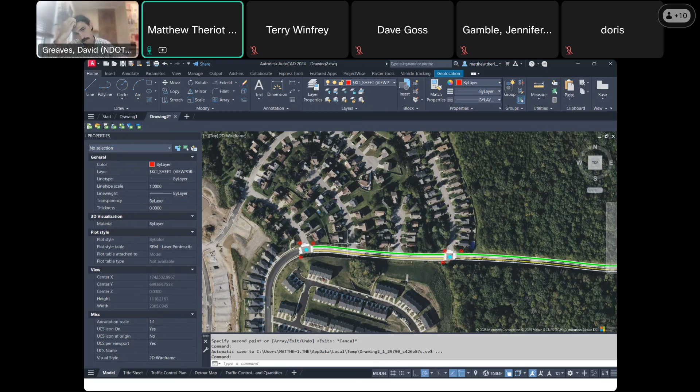So I guess two of the main things that I would be interested in you looking at is if there's a chance of all-way stops being warranted at one or both of these intersections to get vehicles to come to a complete stop and to allow pedestrians to cross if they need to, or looking at traffic circles at either of these locations.

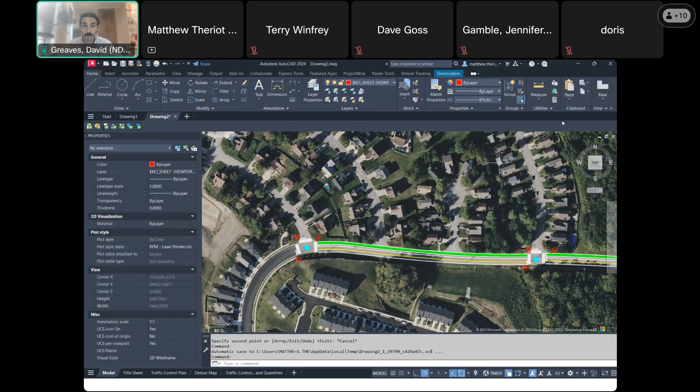Yeah, well, thank you for putting so much effort into this concept. It definitely is one approach that would make improvements. I will say, in terms of doing stop control and crosswalks and things, that does fall a little bit outside of a typical traffic calming project. But I'll discuss it with the team and see if, maybe if the paving schedule is coming up, we can think about that. So anyway, I can't give you a yes or no on if we'll do that right now, but I appreciate the input for sure. Yeah, thank you, David.

Hey, David. Also just wanted to add to Matt's point. Not sure if this is going to be considered in the priority for any projects, but as you saw in the picture, the houses aren't over the whole Mulberry Downs. As you can see, there's forest on both sides, both the left and the right side, for a fair amount of Mulberry Downs. It's only when you hit that playground area that Matt pointed out that the houses start. So not sure if that would influence or change priority for the whole street, but just wanted to call that out.

Yeah, thank you for sharing. I'll talk a little bit about how that affected our initial design draft when we're there, but it is something that, you know, we've noted when we came up with our concept.

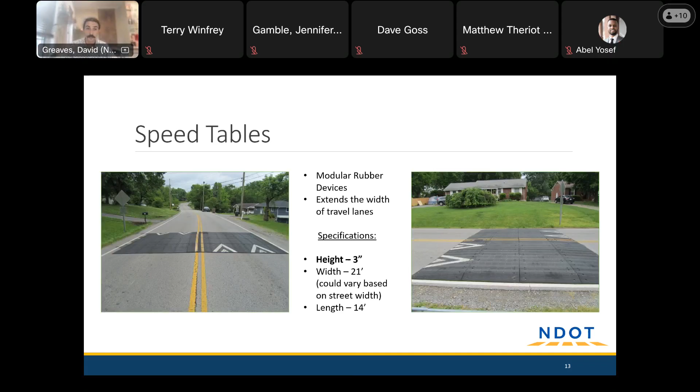Similar to those are speed tables, which stretch all the way across the road. The main difference is these don't allow emergency vehicles quite as much leeway as speed cushions do. The gaps you see between cushions are intended to reduce the impact to larger vehicles such as fire trucks and ambulances, while maintaining impact to smaller private vehicles.

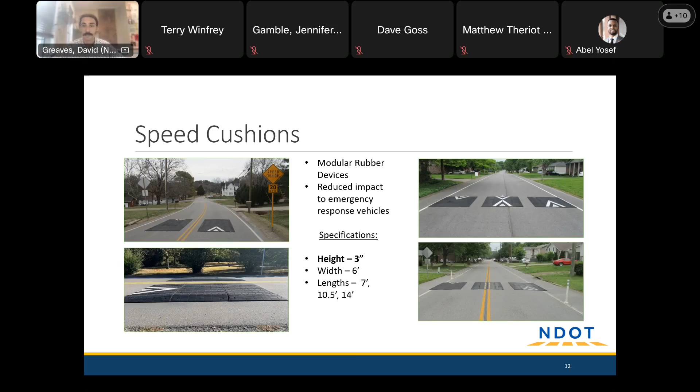We use speed cushions most often because we've seen that they work - a good way to achieve the program's goals. A study we conducted in March 2023 did before-and-after counts on 6 projects, finding the average speed come down from 31 miles an hour to 22, and the 85th percentile speed came down from 37 to 25. Certainly y'all are seeing speeds a little higher than that, at least in the location we counted, but we'd hope speeds would come down to a much more manageable and safe level with a design that included vertical measures.

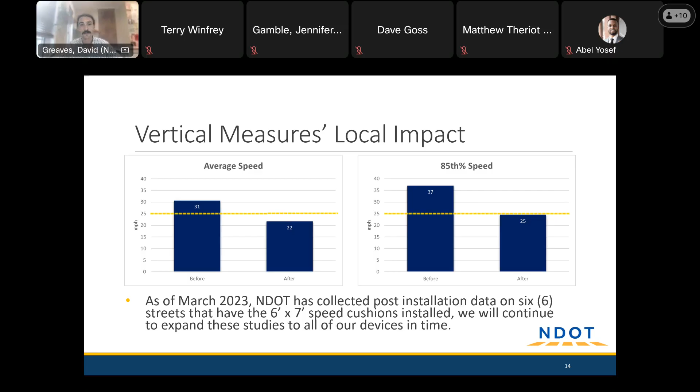There are plenty of places where speed cushions or any vertical measures aren't such a good idea - including hills of a certain steepness, as well as curves below a certain tightness. When we encounter situations like that, we'll sometimes use radar feedback signs. Most people have encountered these - it's a solar-powered device mounted to a speed limit sign that flashes the speed of an approaching vehicle back at them as they approach.

So the idea is if you are maybe inadvertently going much faster than you should, this would give you an indication that you should slow down.

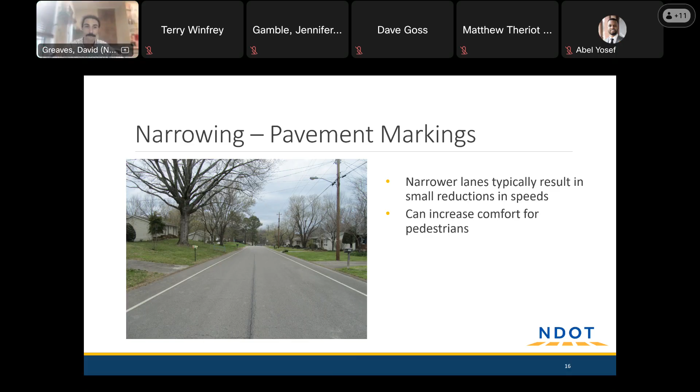We also do pavement narrowing, which is something we've heard mentioned in the feedback. This psychologically makes a road feel a little more claustrophobic. The thinking is if you have a lot of room to maneuver as you're driving, it's much easier to go fast without feeling discomfort. You feel like you're on a highway, and you'll drive like you're on a highway. So when we narrow the lane widths, that can induce slower speeds by countering that effect. It's not a physical measure, just paint on the road, so it doesn't do that much, but it can increase comfort for pedestrians - if I walk over here, I'm on this side of the line, and vehicles are on that side. That's one effect it can have, but in general it's more of a supplement than a primary design tool for traffic calming projects.

At intersections that are excessively large, we sometimes do what are called bulb outs. These work similar to pavement narrowing, but at intersections. When you have really large turning radii, it's easy to take that turn quicker than might be safe for a pedestrian environment. So we narrow it from the outside in by tightening the turning radius so turns happen at a speed slow enough that you'd have time to see a pedestrian crossing the road. Another benefit is it shortens the crossing distance - right now with a roadway that's 37 feet, that takes quite a bit longer, with more potential conflict with vehicles, than if it was narrowed down to about a 20-foot 2-lane distance.

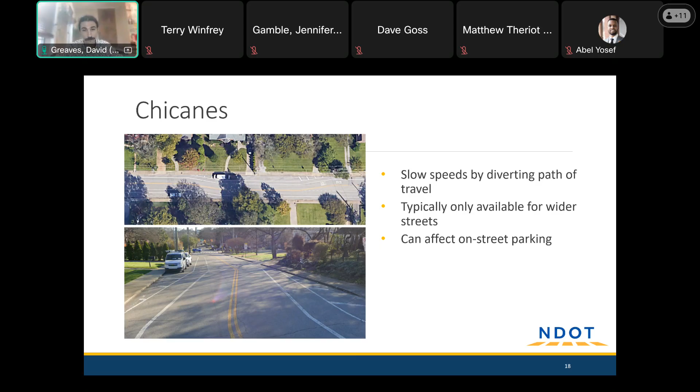We can also do things called chicanes, where the center line is zigzagged back and forth along the length of the roadway. This is Fairfax Avenue over in the Hillsboro-West End neighborhood. You can see these are compatible with bike lanes if a roadway is wide enough. I'll have to check - this may be closer to 40 feet than 37 - but this is something we might consider on Mulberry Downs, since you have quite a bit of pavement to work with. I'd say the one downside is it can affect on-street parking if you limit it to only one side. But from what I've seen so far, there doesn't look like there's tons of on-street parking happening right now, so maybe that's not as big a deal.

And then lastly, we sometimes do traffic circles. I'll say these aren't super common in the NSTC program, primarily because we need to make sure intersections are wide enough that all necessary turning movements can be made, whether it be a school bus or fire trucks and things.

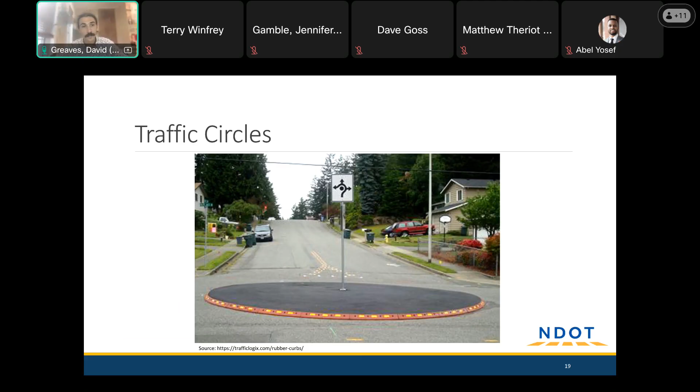Would love any additional feedback or questions on any of the tools. Also would love some more ideas if y'all have any about what we might be missing, things we should consider while we do our site visit and refine the design. So anyone who would like to share anything, please feel free to speak up.

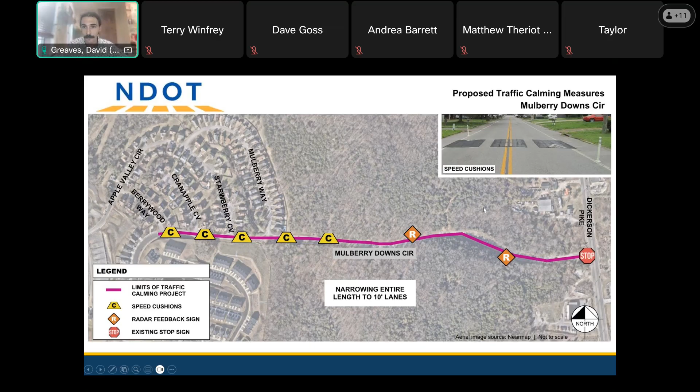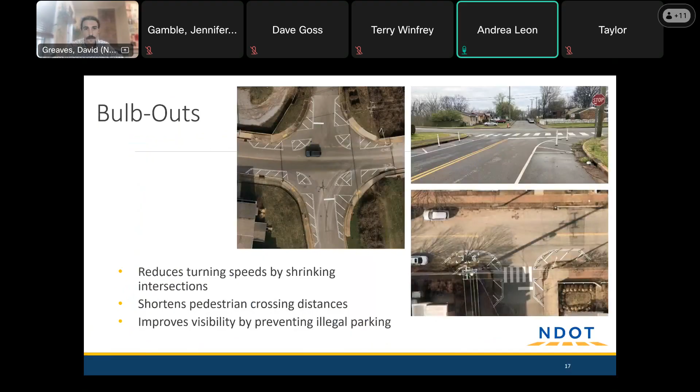This program specifically handles streets one at a time. That can sometimes feel a little narrow or illogical, but we have tried it in more of a neighborhood focus, and it created a lot of unforeseen complications that made some projects basically come to a standstill, and others just sort of get mired in who gets speed cushions and who doesn't, which we want to avoid.

So what I want to let you know is that we would love for that street, or maybe the string of streets, if it's Apple Valley Circle to Mulberry Way, to apply. Certainly, if that speeding and cut-through traffic is happening already. And that application window is opening soon. I think it'll be maybe the first 2 weeks of September. But I can let you all know if you're interested in applying for more streets.

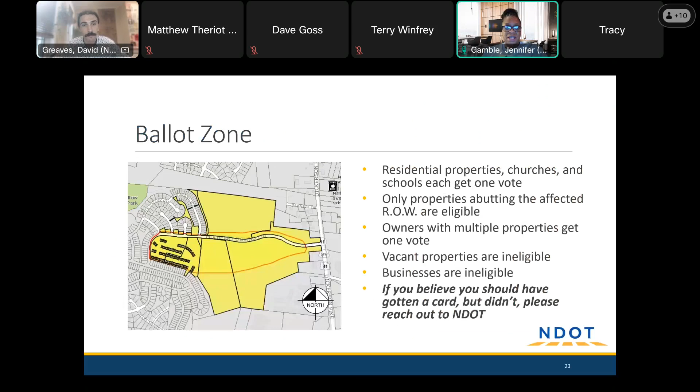David, I may have missed this, so if I did, forgive me. Did you give us a timeline for when you will be able to go back and discuss with the team what has been discussed here today, and when you will have a second revised plan for everybody to look at for that second meeting? Yeah, you did not miss it.

I glossed over it. So the design phase is usually around 2 months. I will say we've got more things to look into tonight than a standard project. So perhaps a little longer, but we'll go out and do our site visit, have our discussions with NDOT, kind of ASAP, and then hopefully get some quick answers and be able to move forward with design. Okay.

So at least 2 months before we hear back from you, and anyone who's interested in applying for traffic calming for Apple Valley Circle, the applications will open up. We think the first 2 weeks in September, and it's usually a 2-week window. And so want to make sure if someone on Apple Valley Circle wants to apply for traffic calming for Apple Valley Circle, probably need to do that during that September opening, because we probably won't hear back from NDOT and David about this project before that time frame closes, and the next time to apply won't be until the spring.

Yes, that's all correct. There may be some upcoming changes to the application window period. I'm not sure if they're totally worked out yet, so I won't give y'all potentially wrong information. But at the very least, first 2 weeks of September likely will be that next application window. And these can be applied for by an HOA, so you don't need to do the 4 individuals. But yes, that's all correct.

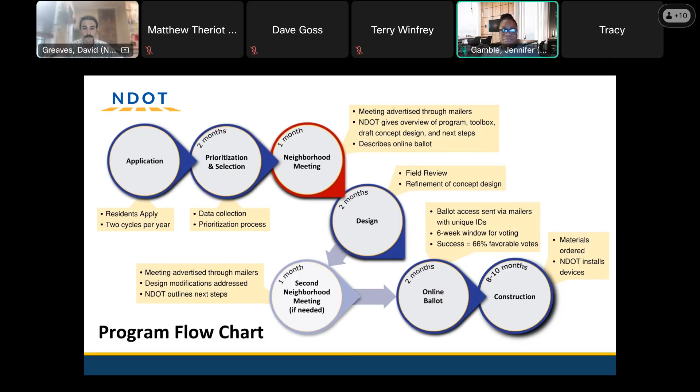I saw in the chat a side note question, and if you will indulge me 30 seconds, I'll try to answer it, because it's not related to this. It's related to what is being developed on Dickerson Pike next to Thornton's. That is actually District 5, but I do know that for that development, I believe a specific plan was passed to develop residential, not single family, townhomes and multifamily. I don't have the numbers in front of me, but it will be residential, multifamily and townhomes. Thank you. Great.